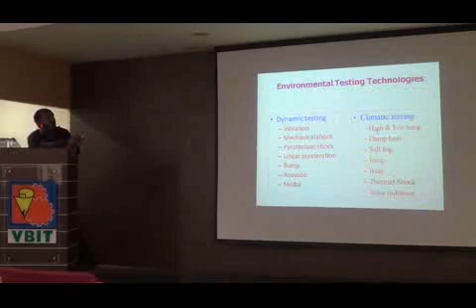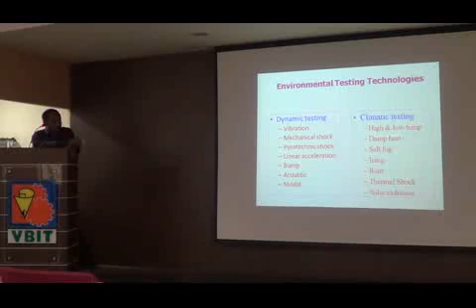So as I told you before, there is either dynamic testing or climatic testing, because dynamic is man-made. These are the things which we will do. These I have listed with respect to our missiles. That means, where do we get this? I will tell you on the next slide. The climatic ones also, these are the things that we actually do, specific to our missile testing.

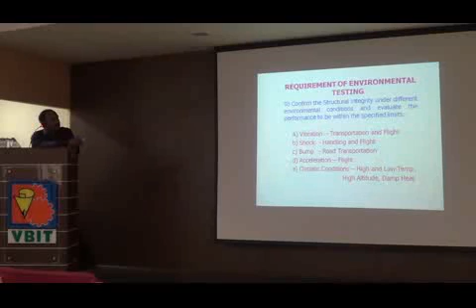So why do we do all this testing? These are the reasons. When we do testing, we want to verify whether our design is okay or not, whether we have any design margin, whether our system will perform in that environment, or are we going to see surprises, or are there going to be any failures for the products that we make. So to be precise, it is to confirm the structural integrity under different environmental conditions and evaluate the performance to be within the specified limits.

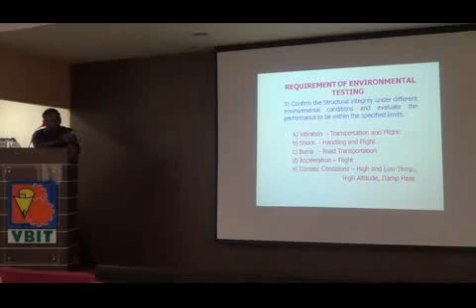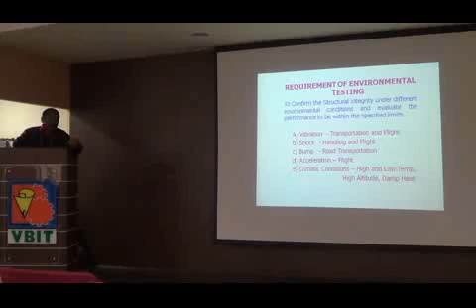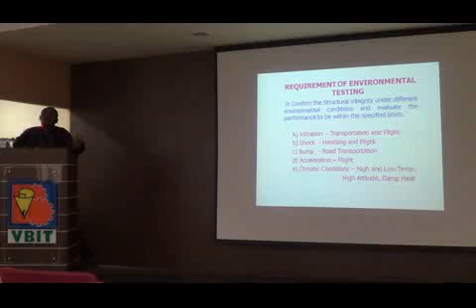These are our requirements. For example, a mission can be lost just because of one resistor not giving its value. So that is the kind of precise success that the armed forces are looking for. But we all know resistance is a function of temperature. So due to a change in temperature, resistance can vary, and that change in resistance can cause a failure. So I should know all these changes beforehand and account for all the failures that are expected. Here I have also listed environments and where they come into flight. You will see in detail.

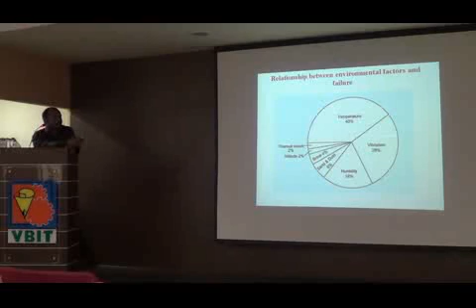And just to show you a relationship between the failures that have happened in our missiles up to now and the environments: most of the failures have come from temperature, followed by vibration, then humidity and so on. If you take 100% of failures, this is the graph that we got. So temperature is responsible for most of the failures. So I should design all my electronics accordingly. Most electronics require fins and other cooling mechanisms to dissipate heat. If you have a problem in that, your system is going to fail. The next is vibration. These two are the major dominant failure modes in our avionics. So we attack them. How we do it, we will see.

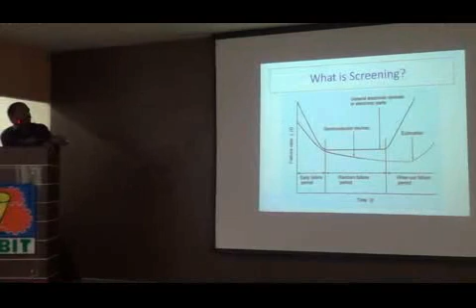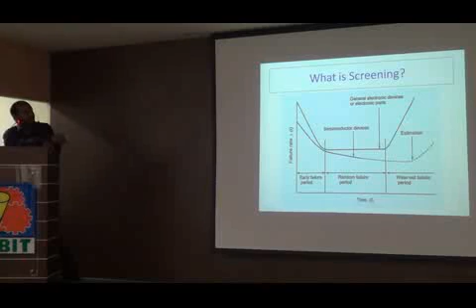Then you should also know what screening is. Every product has three phases in its life: the early period and later ones. In the early period, failures are higher, as shown by the so-called bathtub curve, due to the design not being fully confirmed. Once the design is frozen, you will not have failures; you will have a good life. Later on, after using it for certain years, failures will start increasing due to wear and tear. This is the general behavior of any system or component. So knowing these things, we have to design how to increase the product life.

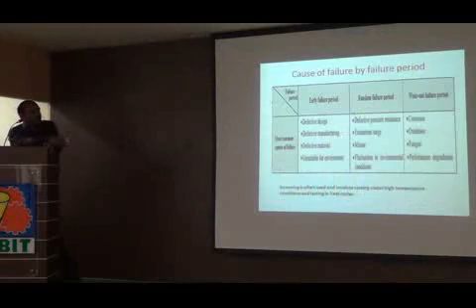This is again the same: what will happen in each period. So now let us look at different things in detail. In dynamic testing, I will basically be looking at vibration, followed by shock and bump, and acceleration. How do we simulate vibration, shock and bump, and acceleration, and how we get all these environments, all this we will see.

See, before coming to the vibration side, I'll just give you a few basics of vibration. Everybody knows what vibration is? It is to and fro motion about a mean position. But the three basic components that form the vibration force, or say vibration causes, are mass, that is inertia, then the damping and the stiffness. See, each of them I have just listed here, what they mean.

Suppose you take a spring as the stiffness; it is responsible for storing potential energy. Say you have a spring, you compress it, it gets compressed by say amount D. Then this is the spring force which is storing that energy. If you take a damper, ideally we have taken a viscous damper here, the viscous force is proportional to the velocity. So the force is given by C into V. The energy dissipated from the system is C into V.

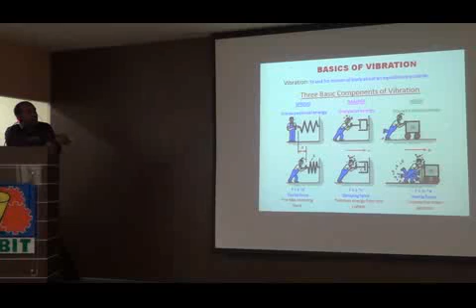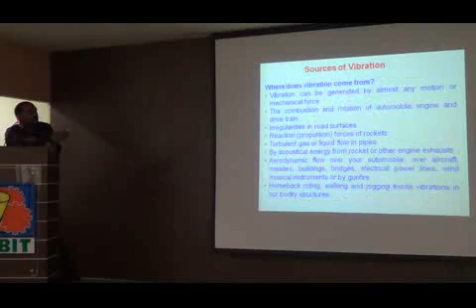And the mass, which is responsible for inertia force, is mass times acceleration. And if you see damping, there are so many types of damping. Here ideally we are talking about viscous damping. So these three basic components determine any structure's vibration behavior. So now wherever you get sources of vibration, whether it is aerospace or missile specific, it can be generated by any motion or mechanical force.

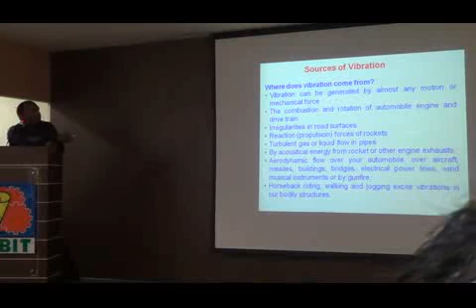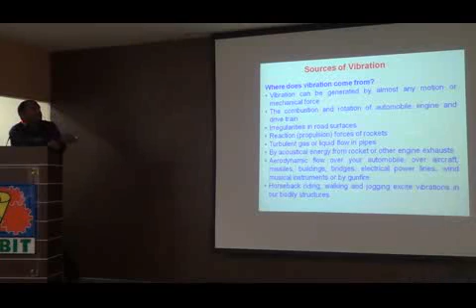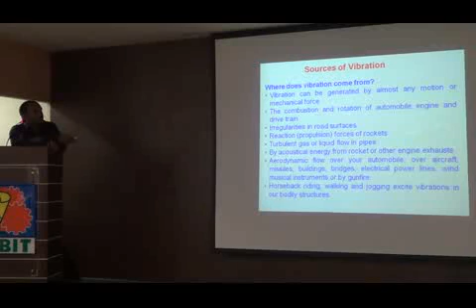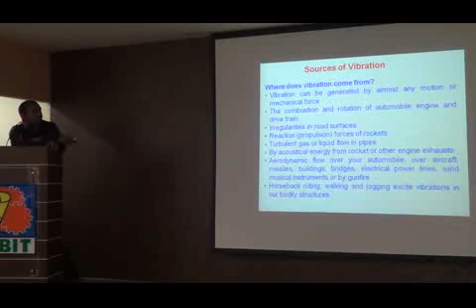A few places where it comes I have listed, like combustion and rotation of automobile engine and drivetrain due to imbalance, irregularities in road surface. Suppose a vehicle is moving on road; due to the irregularities on the road, you get a transmission of vibration from the tire to the chassis, and from the chassis to the person sitting inside or the structure. Then for our missile, due to burning of propellant, gas flows in pipes. And also due to the initial lift-off of the rocket or missile, there is that high sound energy.

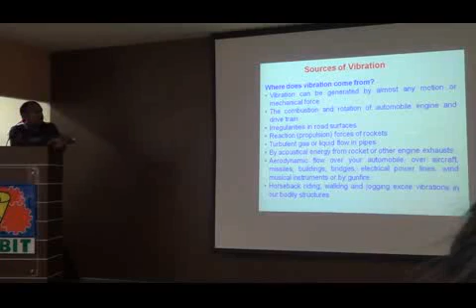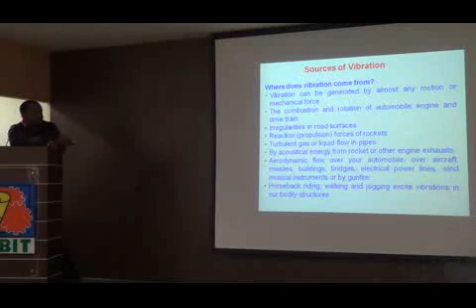And as the aeroplane or missile moves to considerable altitude, you have aerodynamic forces coming. You also get vibration due to other things like imbalance, and when you move or walk. So specific to our missile industry, these are the vibrations due to lift-off, ignition, stage separation and propulsion.

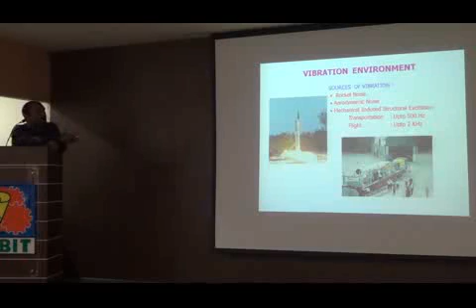And the frequency ranges of our vibration, if you see, differ across industries. If it is a missile lifting off with aerodynamic excitation, we get vibration frequencies up to 2 kilohertz. Whereas if it is transportation on the road, just due to vibration transmission, it is up to 500 hertz. So again, these are the frequencies of different industries.

If it is aerospace industry, it is 2000 hertz. If it is automobile industry, it is 500 hertz. If you consider train, it is 1000 hertz. If it is a ship, it is 33 hertz. These frequencies are important because only by knowing the frequency ranges should we design our system. If you design a system for 500 hertz in the aerospace industry, it may fail. But if you design a system for 2000 hertz in the automobile industry, it becomes an over-design. So you should know the frequencies of excitation and design accordingly.

And now what is the effect of vibrations? You have seen the sources and the ranges of frequencies. What does vibration do? Basically vibration is a to and fro motion, so fatigue cycles are expected, and it may fail due to the number of cycles. And there may be O-rings and seals which are susceptible to vibration and may be damaged. We will see some failures that occurred due to an O-ring of a space shuttle; the Challenger disaster happened because an O-ring failed during the initial launch. So these are very critical.

And there is a propulsion system inside, responsible for taking the rocket to different heights or velocities. If the propellant is debonded, meaning the grain bonding is weakened, the combustion goes into instability and the system can fail. Vibration can create such debonding of propellant, and some bolts and fasteners get loosened due to vibrations. Apart from this, electronic components inside, like PCBs, can fail due to vibrations, or relays can misbehave.

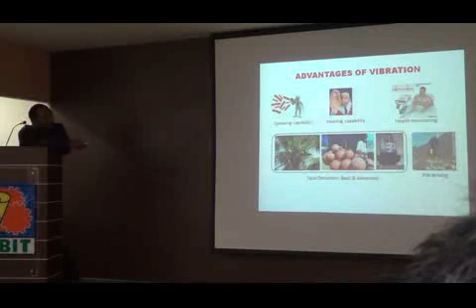And now what we do is, we subject our missile systems to different kinds of environments, and we take something called response. We see the health of the system by knowing the response, by which we know whether the system is good or bad. So this is one of the advantages of vibrations. And you can always see road digging, cutting, all this. These are possible because of the vibrations transmitted from the pile driver.

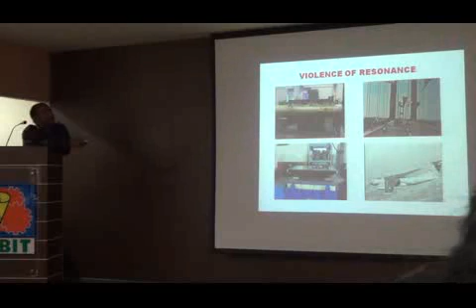And now I will show you a few slides where vibrations have caused major mishaps. This is one of our systems which has failed due to vibration. This was a design failure. So we have designed this. This is a missile actually.

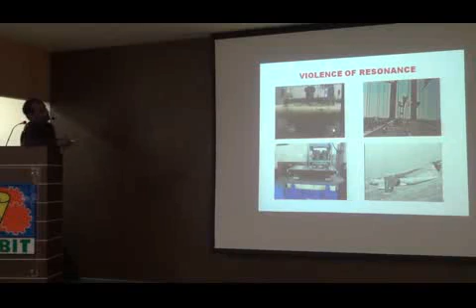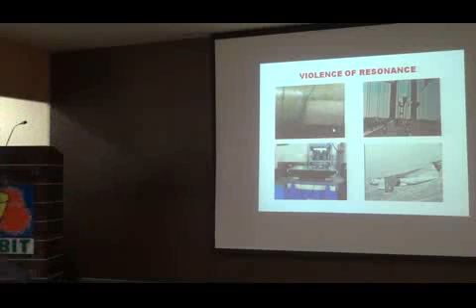It is supposed to undergo helicopter vibration of 500 Hz. So when we were testing it, you will see that it has debonded and it failed. We took around 9 months to solve these problems. Here the problem was that there was a bonding between a metal and the FRP. The joint was failing due to so many reasons. The vibration was so high.

Likewise, this is the Tacoma Narrows Bridge, which was installed in 1940 or somewhere around then in Washington. This is a bridge built on rods, what we call a suspension bridge. A suspension bridge has a number of tie rods. After 8 to 9 months of its inception, it failed due to 2-3 reasons.

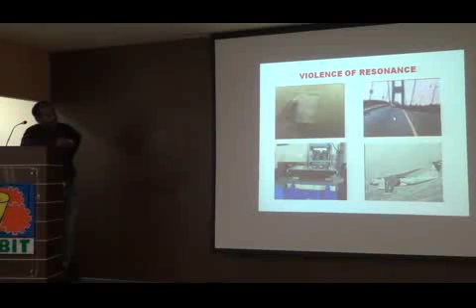One was design failure; that day wind was flowing at 40 to 50 kilometers per hour. So the bridge got into its twisting mode and later on bending mode. Both coupled together, and later on it failed. One of the professors was on the bridge that day, but he could come out. This was one of the major catastrophic failures in the history of bridges. It was a design failure.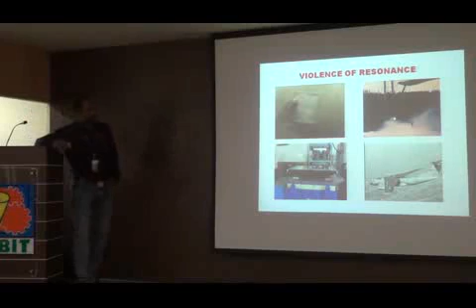There are 2-3 facts in this construction, which later on the professor showed that even simple calculation by hand could have averted the damage, which they did not take care of. One was that this bridge had some columns which were closed from one side. So when the wind came and hit, the bridge started oscillating. Had the columns been open, the wind would have simply passed through, and this failure would not have happened. So like that, simple.

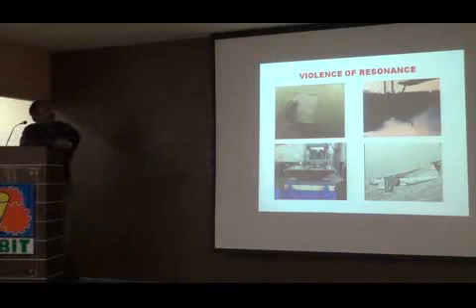This is again one of our systems which has failed due to wrong selection of isolators. An isolator is a system which is put to protect another system. This is a PC used by one of the defense services. This is a very delicate system. It cannot withstand the level. So to protect this system, we use something called an isolator. It is like a resilient element between the source of vibration and the system.

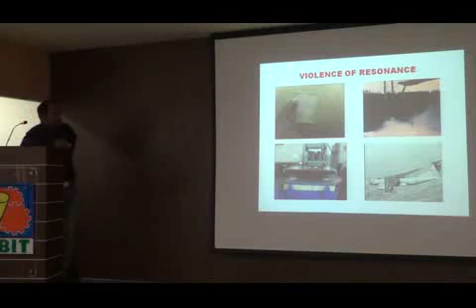So here they have chosen a wrong set of isolators. That caused the vibration input to amplify, and rather than protecting the system, it damaged the system. You can see violent oscillations of the system. Having noticed it, we stopped it. We did not allow it to fail completely, but it still failed.

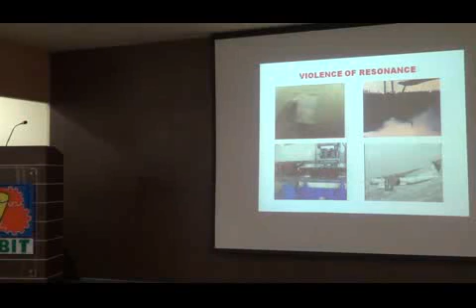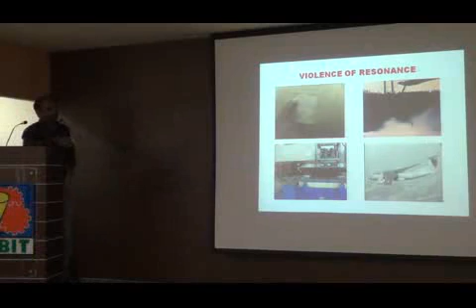This is flutter. Sometimes in the aerospace industry, when the wings are not designed properly, you get flutter. Such kind of system in this. Right. This is again one of the space shuttles which failed. You see the video. This was due to one of the O-rings which failed, during liftoff.

Here it shows the comparison. Actually, the same thing repeated again in 2003. Columbia failed. So it will show the difference between the two. Just see. One was the O-ring failure. One was the shielding which they do for the re-entry side.